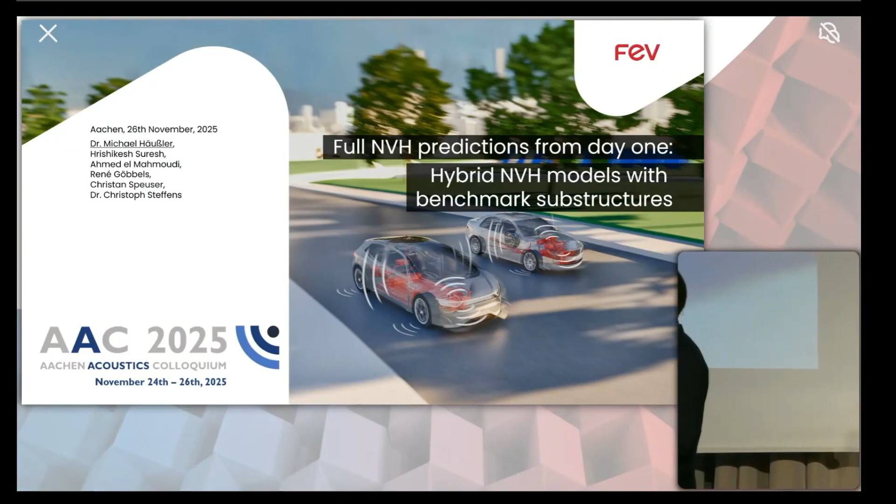So today, I guess the exercise is to show you how to bring the frequency-based substructuring and block force idea into the development process for NVH of vehicles. My talk is called Full NVH Predictions from Day One with hybrid NVH models. That means coupling experiment and simulation models together, and using especially benchmark substructures, because I think this is something that is not yet used as much as it should be to solve problems.

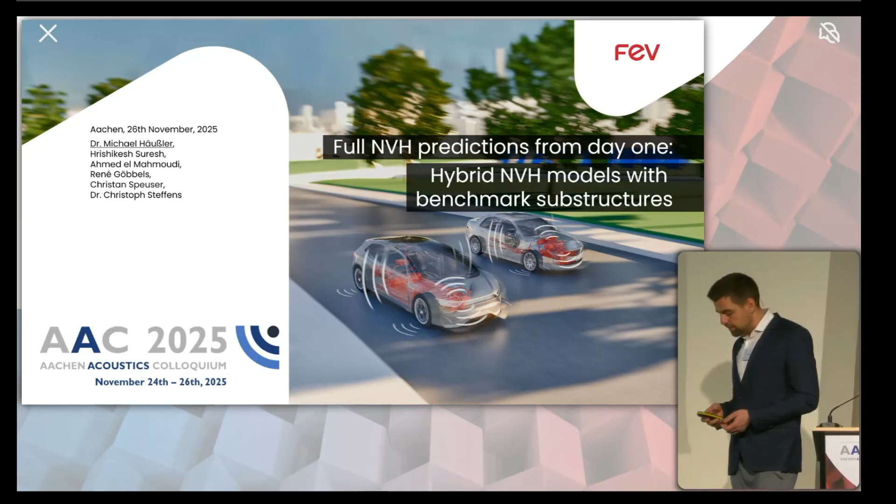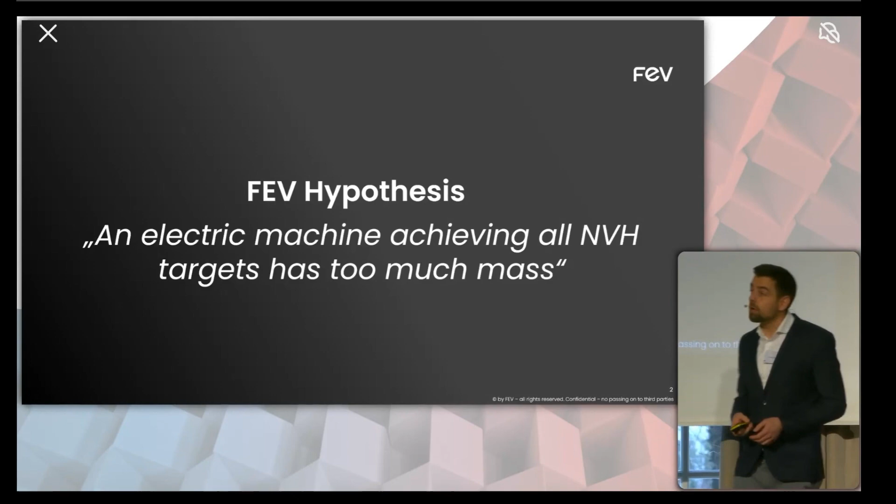And I want to start my talk with a bold hypothesis, namely that an electric machine which is achieving all the individual component NVH targets just has too much mass. I know this is a bold statement, but I'll explain a little bit why I think this is often the case and how I think we could improve the process.

For that, I want to first give you a motivation, namely showing a little bit about the V development cycle that we use for NVH engineering and the integration in the car. After that, I have a few slides on the basics. We've heard a lot about the theory from Daniel Rixen now, so this is from a high-level overview. And then mainly coming to the third point, which is building a model library of substructure components from benchmark testing.

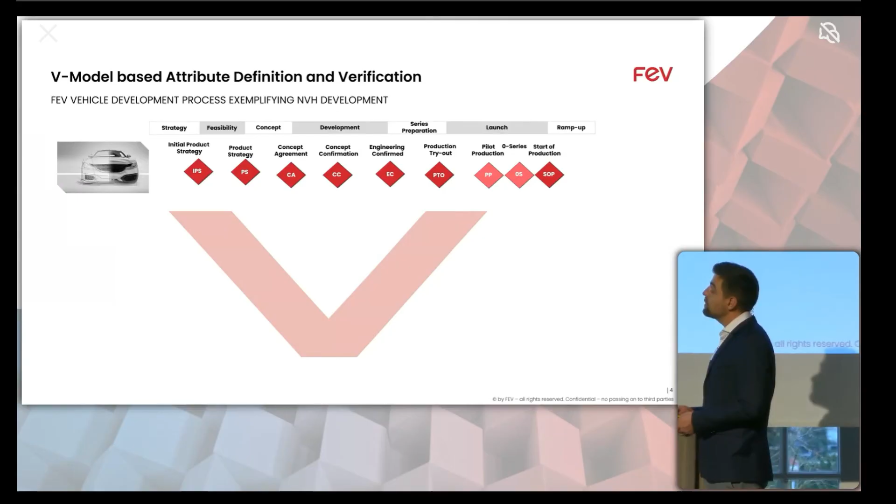So starting again with the V model, we want to have a nice product. We start in the concept phase. The first thing we do is check on the customer level what the drivers want to experience. What does best-in-class NVH mean for the product we are designing? Then from this complete vehicle level, we need to go down to the system level with a target cascading, and finally also come up with targets on the component level, specifying all the individual vibration levels, airborne sound excitations, transfer paths, etc. Here we also have agreements which are, in fact, legally binding with suppliers, for example.

Then afterwards, if we go into the hardware phase of the development cycle, we get the first prototype data in. And we might get violations of these component targets. Then it's really the question: do we want to change something? It might be expensive. Later, if you integrate this component, you have all these goal conflicts between NVH and driving dynamics very often. Driving dynamics guys want the stiff bushings. We want to have the soft bushings.

There's also some goal conflict sometimes with the efficiency of the electric motor, for example, which is the example I'm going to use in this talk. Also in our paper, you see something on the Audi SQ6, where they played around with the inverter control of the EDU to find a balance between NVH and efficiency in some speed ranges. I think that's quite interesting. And of course, I have to mention that you can do over-the-air updates when the vehicle is already out at the customer to fix some sounds that you don't want. But even with sound design, you can't really fix a bad mechanical design.

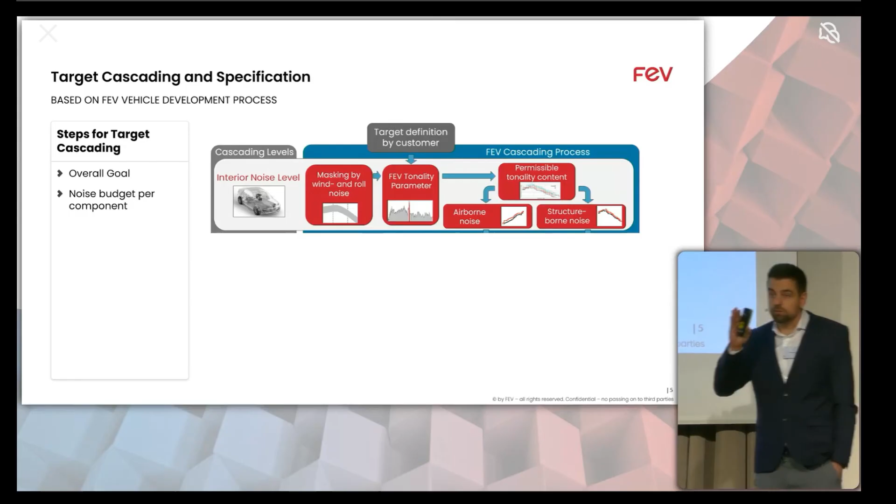So I want to talk a bit more about the target cascading process, in a nutshell, how that is typically done. As I said, for the example of the electric drive unit that I'm showing here, we have our goal at the driver's ear. This is really what we want to achieve. The driver should have a comfortable ride. So in words, the target is a quiet ride without any tonal or harsh components. For the EDU, you've got some masking noise from the wind and rolling, and the tonal order components from the EDU shouldn't stick out of this masking carpet too much. So you might come up with a tonality parameter to specify the target for the sound of the EDU in the interior.

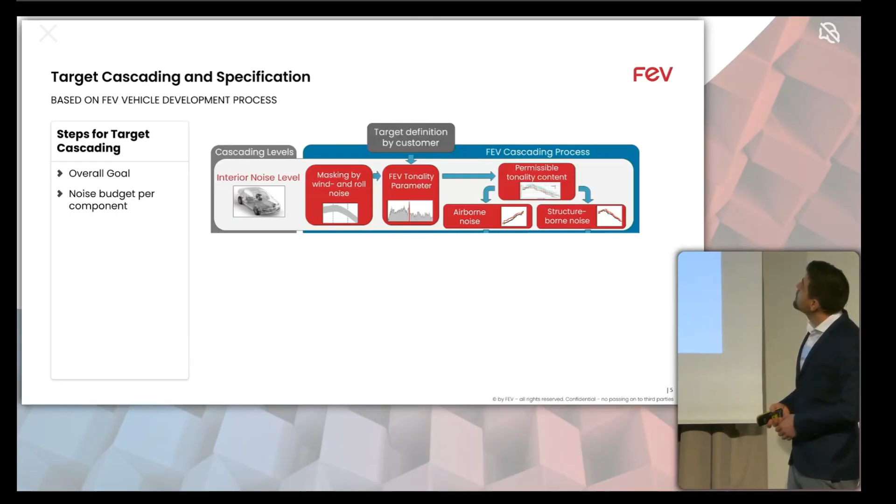And then you already have to make an assumption, namely because you have to break down the sound in the interior into the airborne contribution, so what does the housing of the EDU radiate directly and which comes to the driver's ear, and what goes over the structure-borne path. And this is already a mathematically underdetermined problem, right? You've got a single target, and you've got to give two targets to two paths. So this is by definition mathematically underdetermined. There's infinitely many solutions. You've got to make some assumptions.

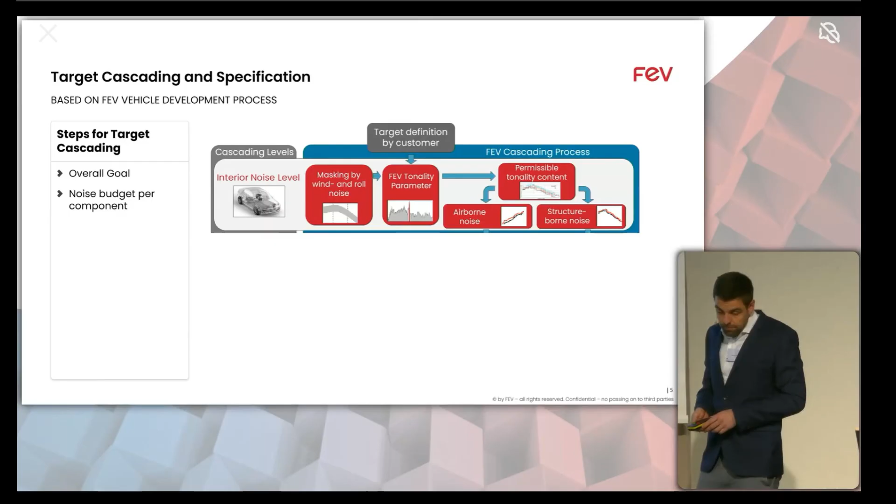And if you go then even further, you need to cascade it down. So you've got individual transfer functions for the airborne excitation. There's a little bit of a secret sauce and some, let's say, culture at each OEM, how they do that. And the same goes for the structure-borne transfer functions, where you just know maybe from experience, from the previous cars, how they look like. And then you also give individual targets for the structure-borne excitation. So that could be vibrations at the mounting points in each direction, or forces at the mounting points in each direction. And that's what you finally give to your suppliers.

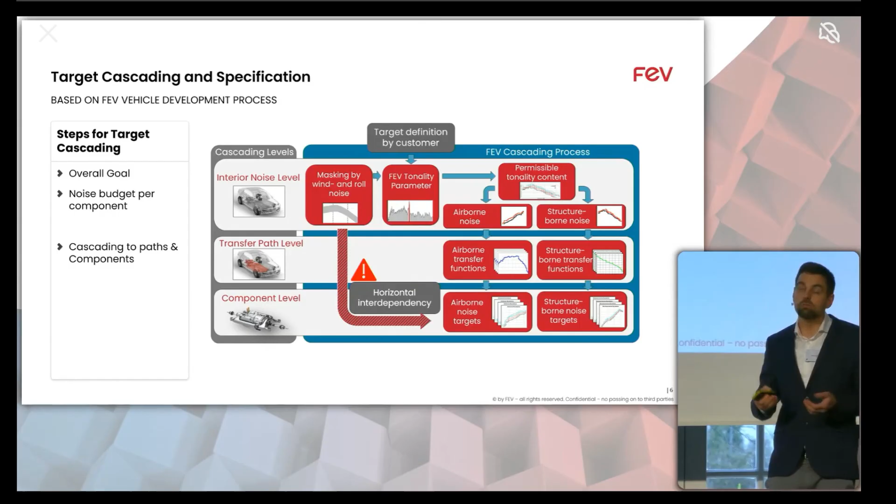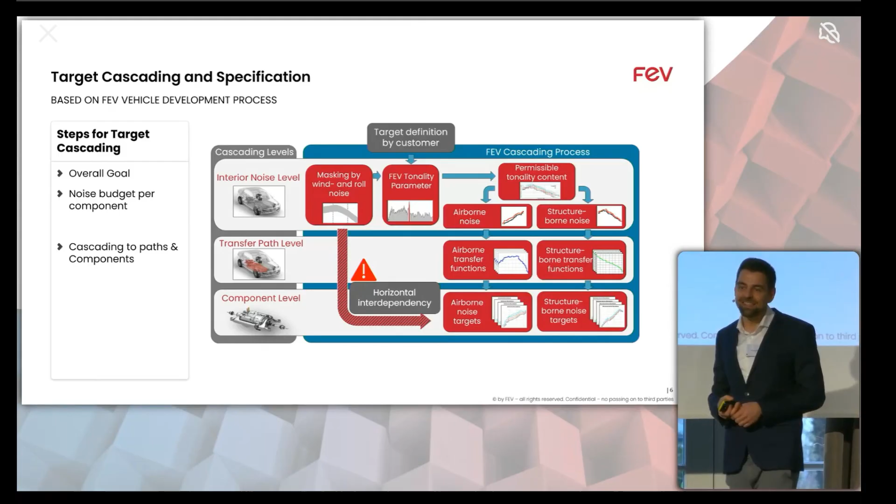But the thing is, when you don't have the car yet, you're making a lot of assumptions, and you have all these interdependencies which you're trying to freeze in this early stage, which is not really there. So when you do this target, you have this horizontal interdependency. The whole EDU target depends on what is actually going to be the rolling noise in the vehicle, what's actually going to be the wind noise. And if they do a better job than they should do, this is a problem for the EDU guys. So you should always hope that your colleagues from the road noise departments don't get much better than they need to. Otherwise, you're going to hear the EDU.

And there's, of course, this other interdependency, which I call the vertical interdependency, namely that you have a single target at the driver's ear, and you want to break it down into a large catalog of individual target curves for all the components and all the individual forces. And that is, by definition, mathematically underdetermined. So some people make an assumption that all the transfer paths stay the same in their individual weighting compared to the predecessor vehicle. There's optimization methods. I think there's clever stuff with solution spaces going on right now, but that's not my topic here.

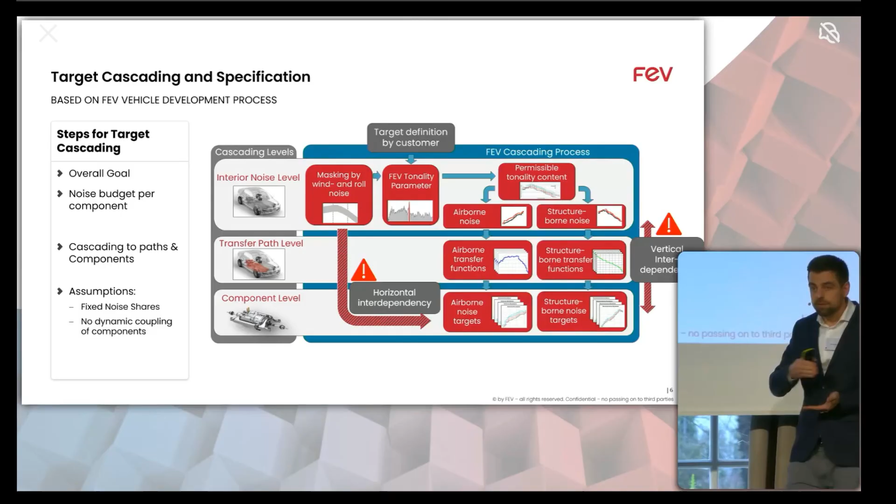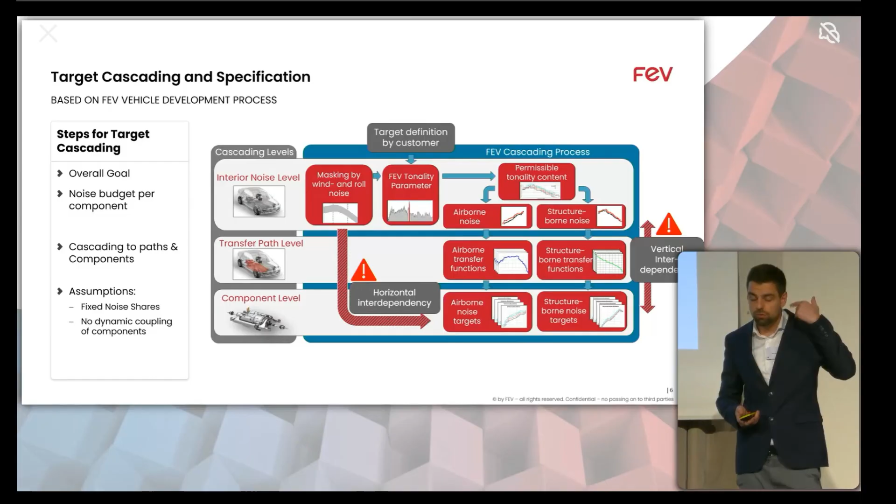The main message I want to give you is that this target cascading process is, in my opinion, important, but it's never really perfect. And I would argue that it's better to have a process which can go directly back up to the driver's ear and see what things mean.

So what this leads to often in discussions between, let's say, an OEM and a supplier of an electric drive unit is, well, okay, we have these targets. This is just one example, for a car transmission. And you have these yellow target levels at different speeds. This is for a single order of the transmission. And you can also see that for increasing speeds, this yellow bar increases because the wind and the rolling noise increases. And in red, you see the measurements at a coupling point measured with an accelerometer. And here you see, oh wow, there's a violation of the target at 2,500 RPM at this one coupling point.

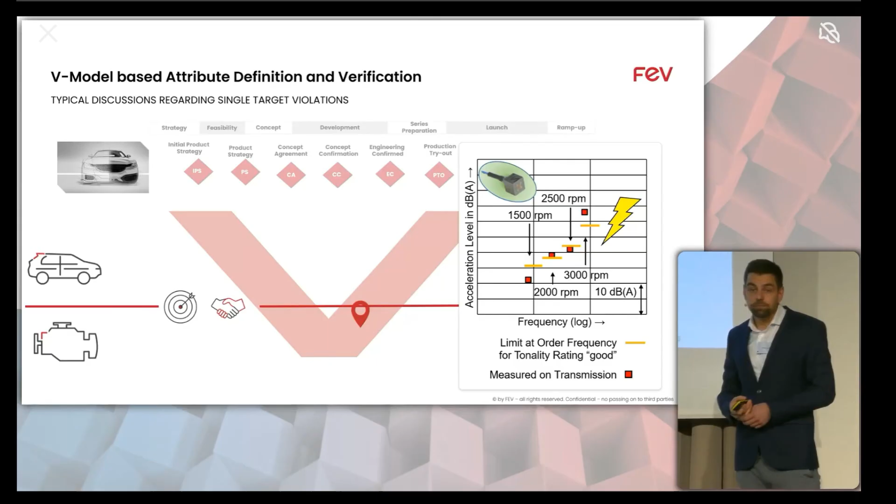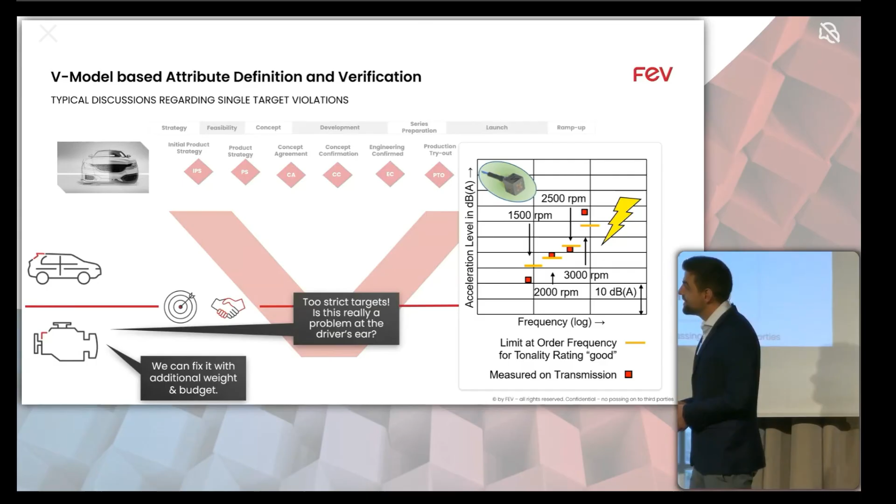And now really the whole fun story starts because then the supplier says, well, we can fix that, but we need additional budget, we need additional weight on the transmission. This is something you want to think about if you intend to produce 1 million units of it. Then the discussion goes, well, I think the targets are too strict. Is it really a problem at the driver's ear? Unknown, we don't have the vehicle yet. The OEM is raising the question internally, well, what's actually the status of the masking noise? Is this really a problem?

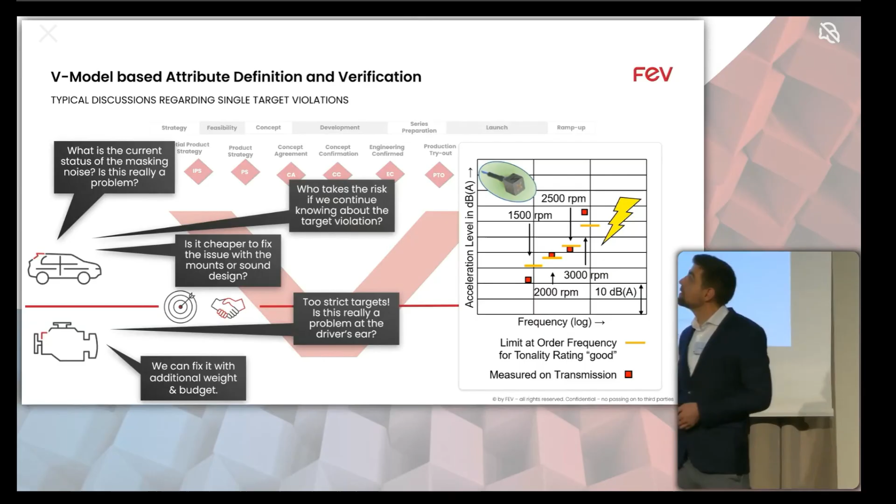Also, it's a question, is it maybe cheaper to fix the issue with just changing something in the mounting system, or can we actually add active sound design to just mask it a bit more? And maybe the most important question of all, who takes the risk in terms of budget if something goes wrong, if we continue knowing about the target violation and something goes wrong?

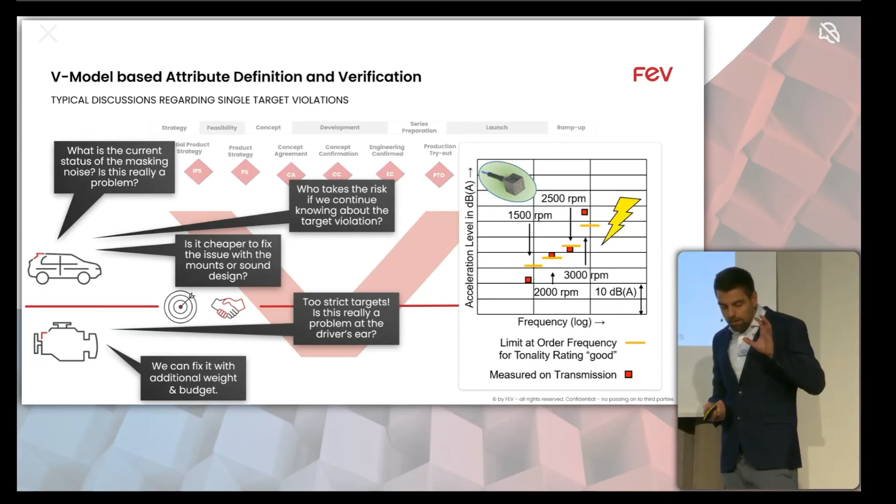So what I want to argue for is that while it's still important to derive these component targets, I think it would be much more helpful to have a full NVH prediction at the driver's ear, actually from day one, and to set up a process where you can have an instant digital NVH twin of the concept you're currently designing.

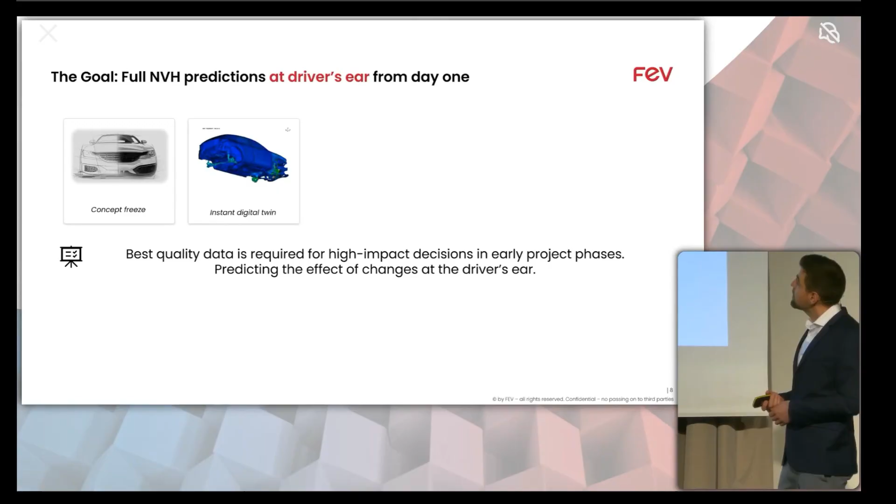And for that, you of course need really good data quality from your predecessor vehicles to make these decisions. Do we want to continue knowing about a single target curve being violated? And have a sophisticated change management process of your full vehicle model, so that as soon as new data arrives, we get in the first test data from the suppliers, we get in updated finite element models of individual components that we can change them like Lego blocks, and you all see where this is going. This is going towards substructuring to see if this is actually going to be a problem at the driver's ear.

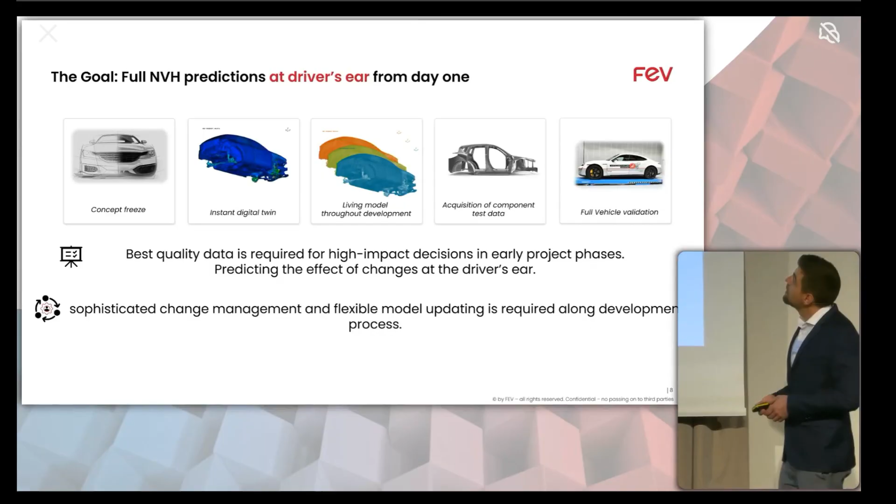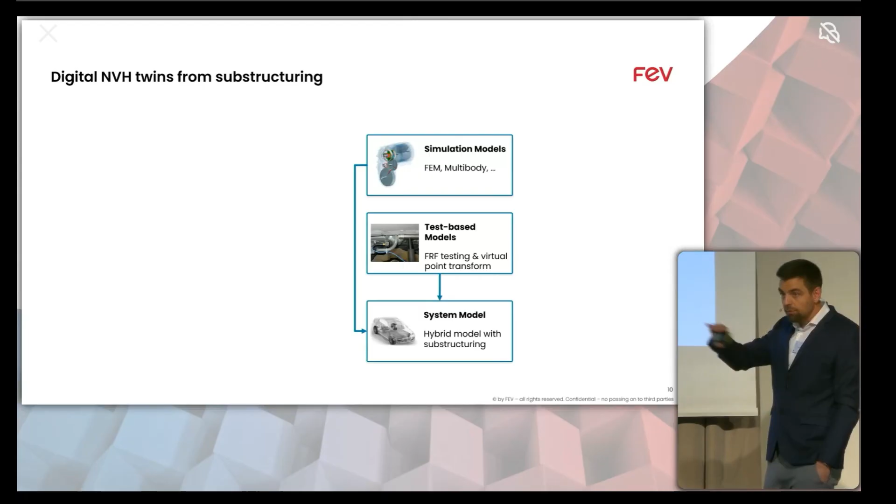So this is what I want to show, and want to go into the basics a bit with how we can create these digital NVH twins from substructuring. So basically you have your simulation models, your test-based models, and you want to couple them on the interface to create a hybrid model of the full vehicle to get the full transfer path from the source all the way up to the driver's ear.

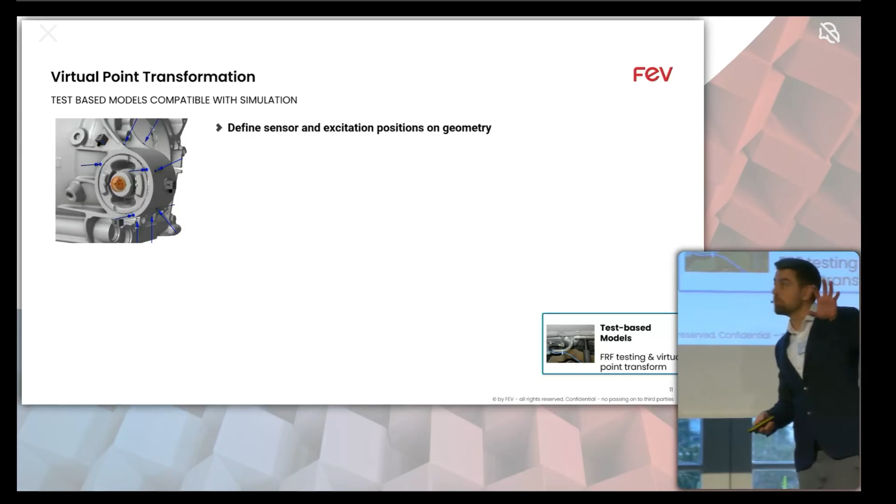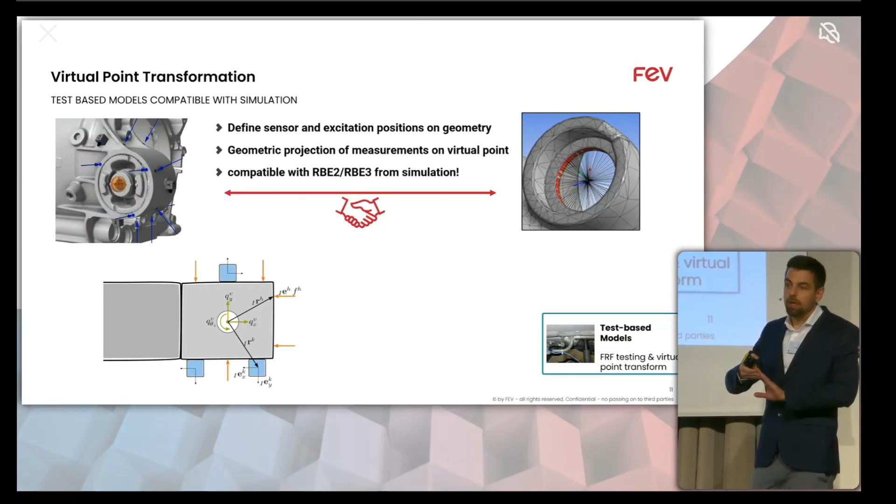And as Professor Rixen has already shown, you can use testing to derive experimental models, and you can use the virtual point transformation. So you basically have the geometry of your component. You place your sensors, you place your excitation points where you excite with a hammer or a shaker. And then from knowing the geometry, you build these transformation matrices, and project everything into the virtual point. And that is, in principle, compatible with simulation, where you have these RBE2 or RBE3 spider elements, and you can enforce this compatibility equation, namely that they do the same vibration and that the forces are in equilibrium at this point. And thereby you can couple very flexibly, actually, simulation and test-based models to each other.

And this is an example from still my PhD thesis that I brought. This was about the electric climate compressor in a car, which I show because you can see how flexible this is, how you can mix the models. So the climate compressor was basically modeled as a rigid body. That was the simplest and best model in the frequency range of interest for the climate compressor. Then you have an experimental model of the rubber mounts, or this could also be just a parametric analytical model if you're still in the concept design phase and thinking about what do we need in terms of stiffnesses there. There was a finite element model of a pure metal intermediate carrier. That was basically an isolation mass, just a metal structure. Finite element is perfect. And then a transfer function of a mule vehicle. So this was one of the predecessors which was used to carry this concept. And then it was actually built up, this assembly, and that's what you see at the bottom here.

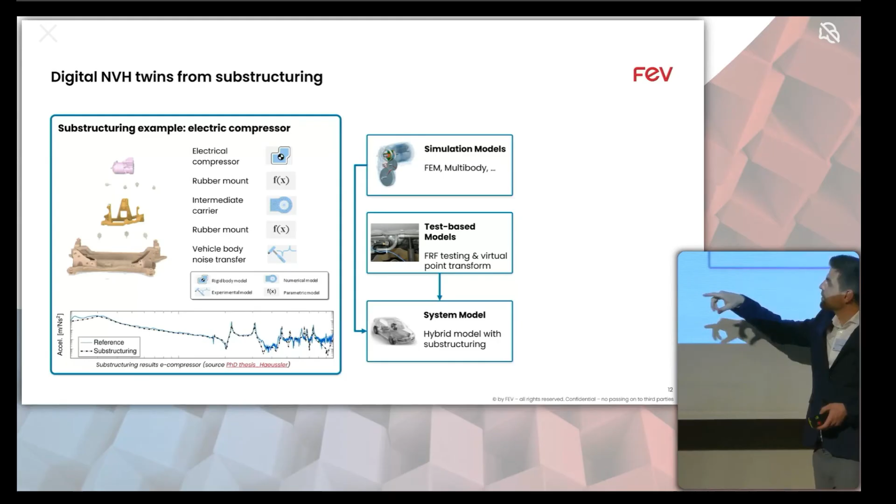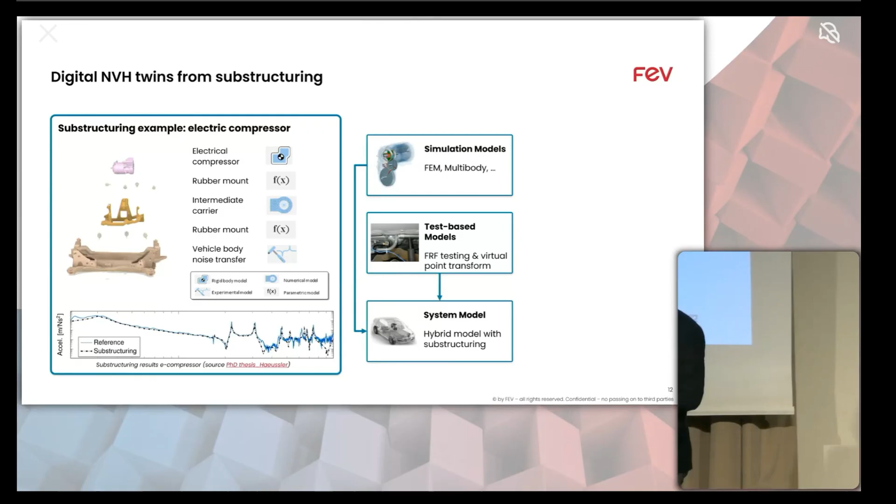This is just one single FRF curve where you see the actual measurement in blue, and in black the prediction with substructuring from all the individual components. And what you also see there, what I find interesting, is that also here at the higher frequency range, I think this stops at 1 kilohertz, that's because the bushings were so soft, you couldn't get enough energy in with your excitation equipment, so it's really noisy. But with substructuring, you model each structure with a good signal-to-noise ratio, or it's just from simulation, and you can even get cleaner predictions up to high frequencies. If everything goes well and the interface problem is well conditioned, I was a bit lucky because the bushings were quite soft, so it's kind of a real-world way to do regularization on the interface. Anyway.

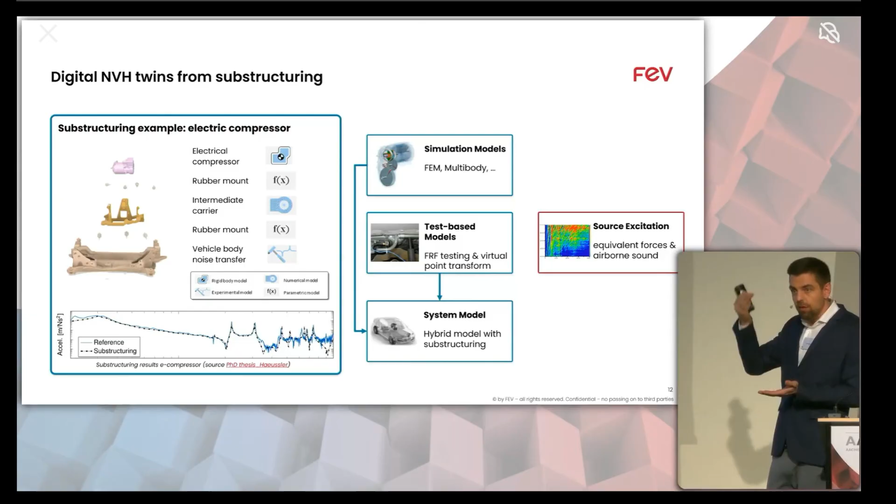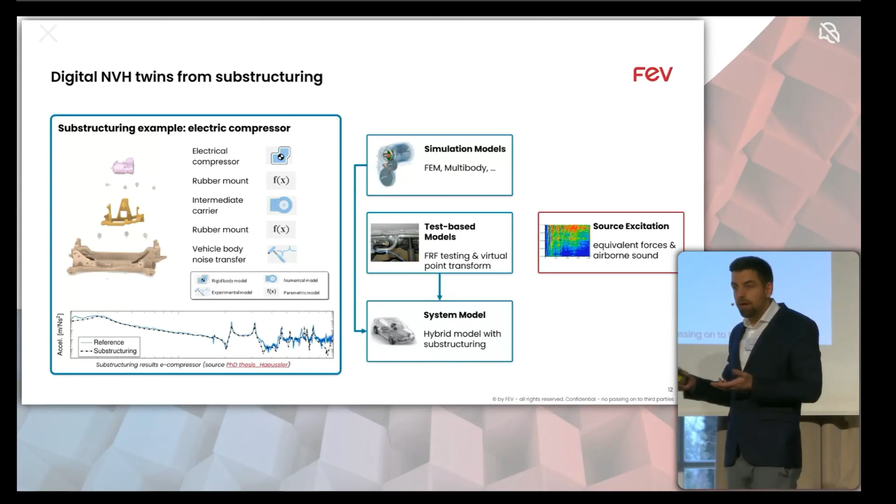So the last thing you need, you then have the transfer path from the source all the way up to the driver's ear, and the last thing you need is a way to describe the source. And this is, as we heard, can be done by blocked forces or some way of equivalent forces. The same is for the airborne sound. I'll go into this in a bit.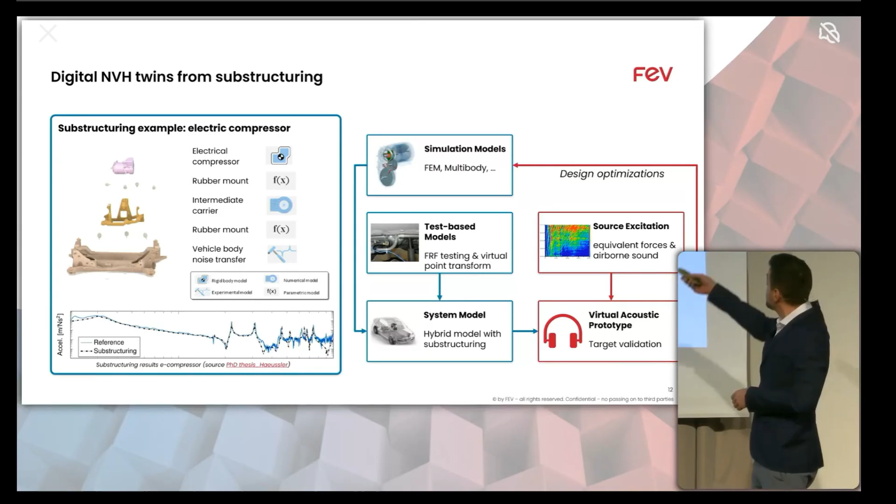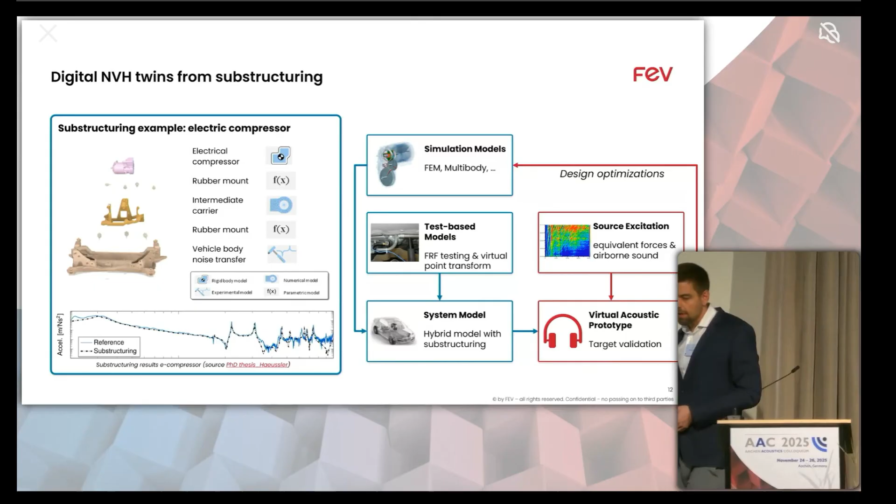So finally, you have what I said at the beginning. What is the target? You want to have actually a prediction at the driver's ear as early as possible, because that is finally what you're selling to your customer. You're not selling a target curve on the engine, you're selling a sound at the driver's ear. Good. So, yeah, and you can then make a, in my opinion, more justified decision if you want to change something on the system, or if it's actually just a violation of a target curve, which doesn't really matter at the driver's ear.

Good. So what I think makes sense to do is something that everyone is already doing, and also we at FEV are doing quite elaborately, namely benchmarking. So you get benchmark vehicles, you see outside the door, you see the Xpeng G9, to find out what is actually the current status of the market, the best-in-class NVH.

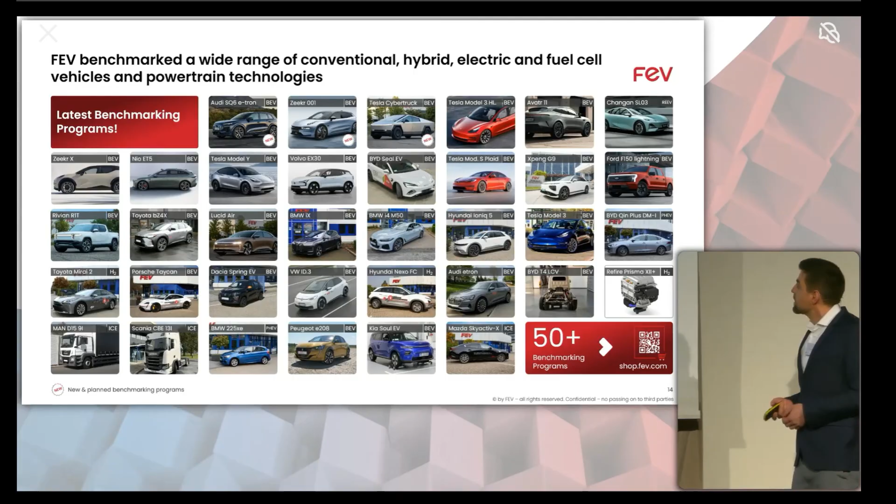And we have a benchmarking program here where we basically monitor the markets, take the most interesting technical concepts, get the vehicles in, and give you quite elaborate benchmarks and store that in a database called Karat. So what we do basically, this is a more recent roadmap. This was from 2025, is that we have 3 benchmarking centers worldwide, one in Europe, one in China, one in the US. They monitor the market and take the most recent models from the local market. And then we do benchmarking on our own initiative or on customer request.

And this is done in what we call level 1, level 2, and level 3 benchmark, where level 1 means the what, so what the driver experiences. In terms of NVH, this means we drive the car, we do measurements at the driver's ear at a certain test matrix, different driving conditions. We do subjective evaluations with our NVH engineers. And that's the level 1 benchmark in terms of NVH. And we do that for all the other attributes of the car.

The level 2 would mean, after the what, kind of the why. And for NVH, this means we do a more elaborate instrumentation. So we put a lot of sensors on the individual components, more microphones. So say at the EDU, at wheel knuckles for the road noise, etc. And at level 3, then it's really the tear down of the car. So where we disassemble it, where we do elaborate documentation of all the parts, also an estimation for what this costs and how it was produced and why it is designed in a certain way.

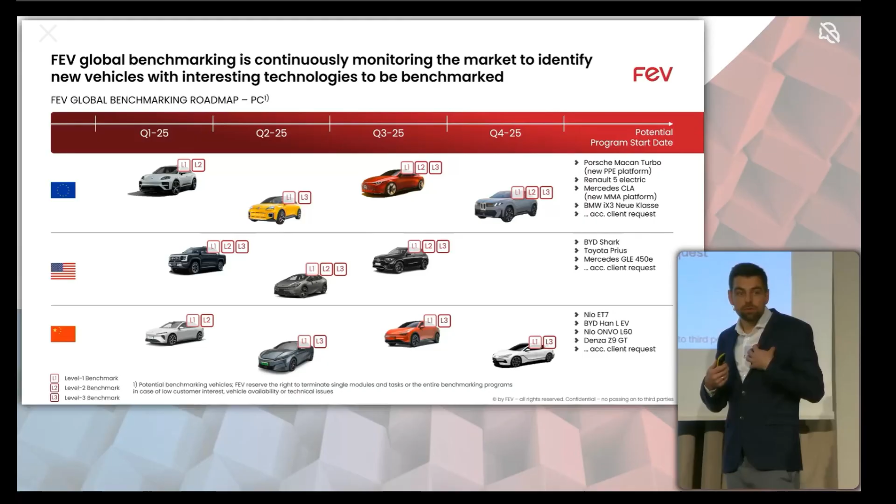And so this is the overview of the benchmark program, but for me, this was very natural to say, hey, we should use this for NVH. If we do this anyway, we should build a model library that gives you kind of modular models of all the benchmark vehicles. So concretely, this means on the example of the EDU, we want to have a source model of the EDU. So we need to have something that describes the structure-borne sound. Well, that's equivalent or blocked forces. We need to have something for the airborne sound and something for the passive dynamics.

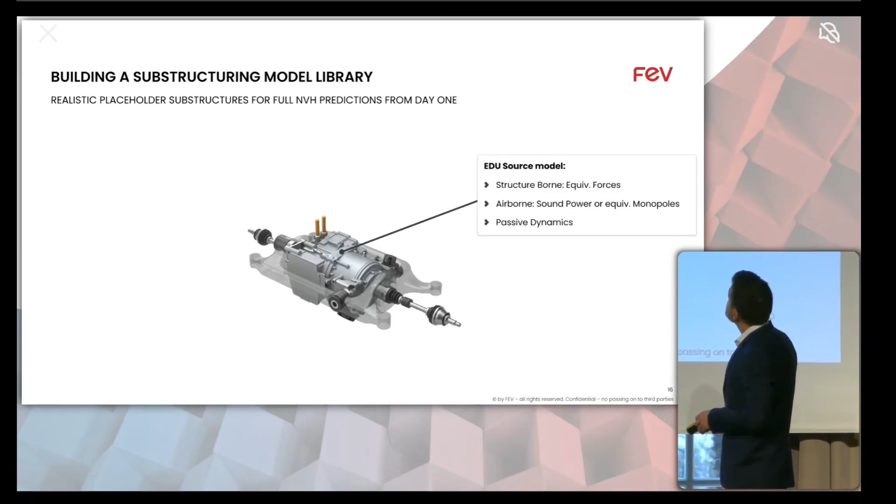So going into this in a bit more detail, say we are at a level 2 benchmark. This is the Audi SQ6, and we do operational measurements. This is an all-wheel drive acoustic dyno of the car. We often take a 3D scan of the EDU in this case, because it's a benchmark car. Audi wasn't nice enough to give us the CAD geometry, and even if they had, we wouldn't be allowed to use it for public purposes, but this is a car that FEV bought.

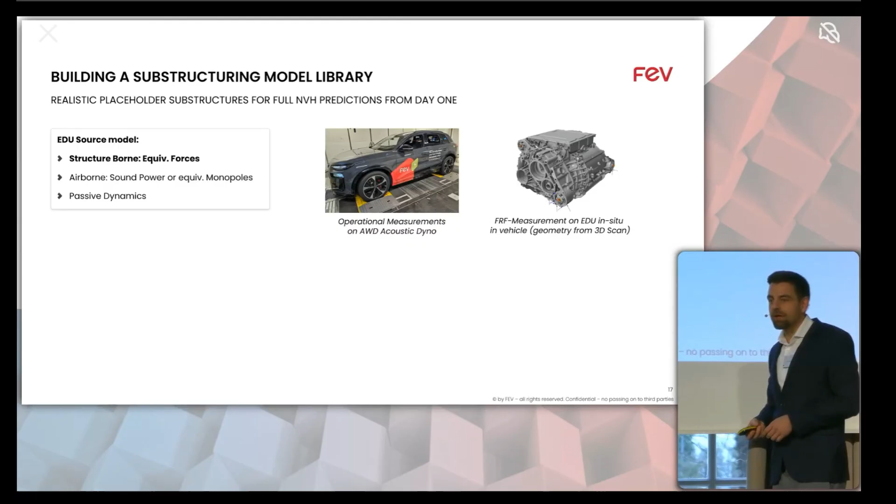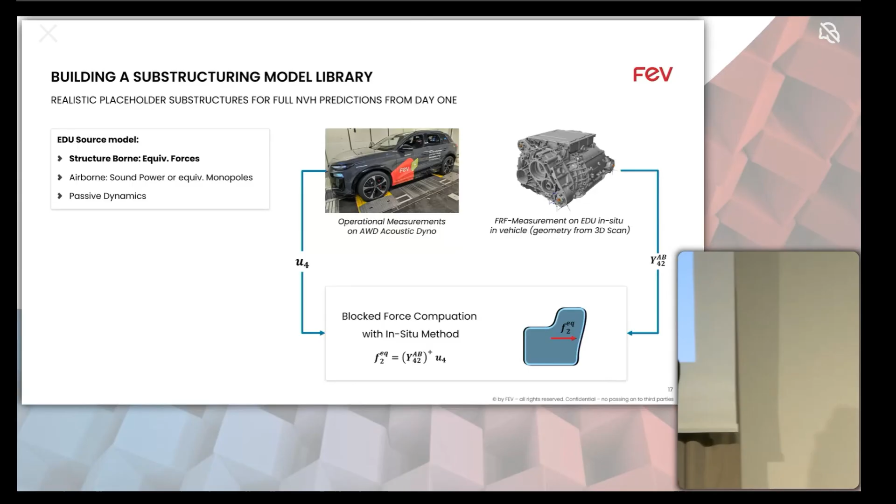Okay, so we have the geometry, we can place our measurement equipment at the coupling points, we can do impact testing, and then get an operational signal from this test matrix we do, and we have the transfer function that we measured. And as you've just seen, we can compute the blocked forces, which describe the source, so the EDU excitation, in all these different driving states that we test by computing them with the so-called in situ method.

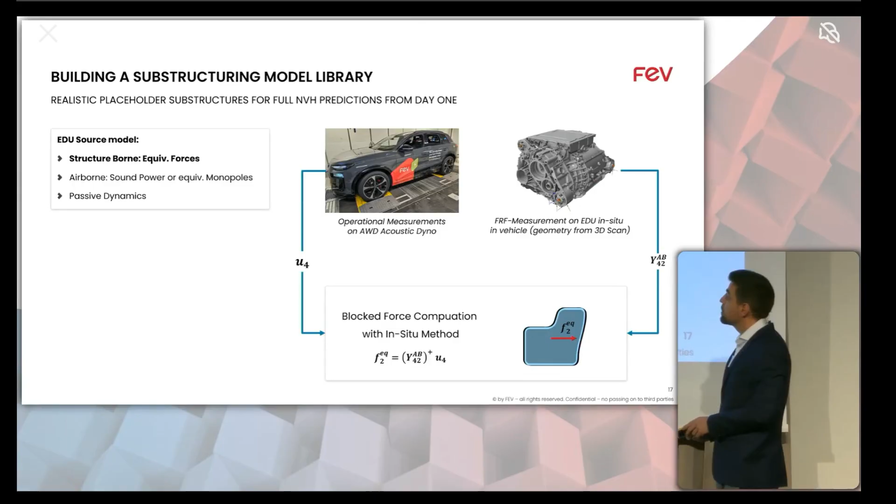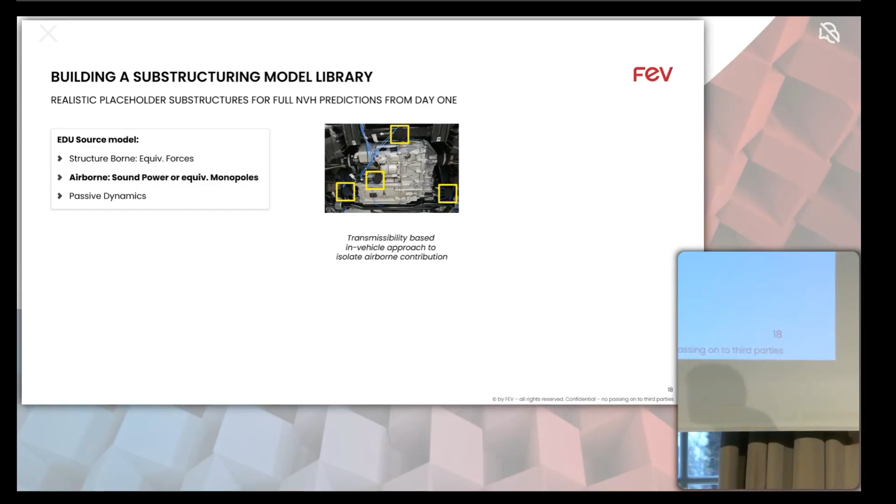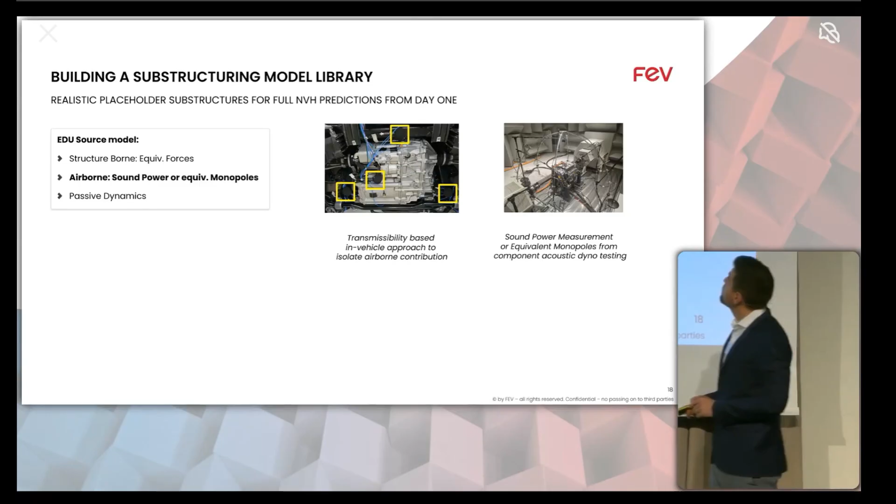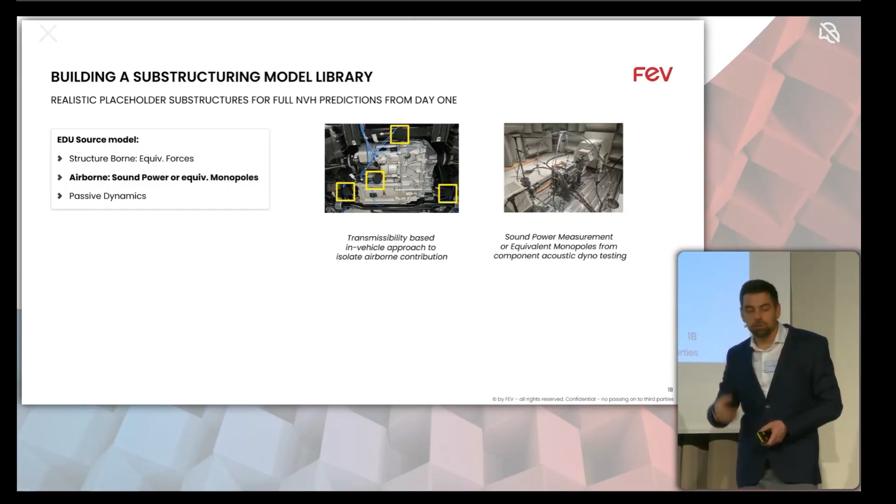The other thing that goes into the database is the airborne sound path for the EDU. If we do just level 2 testing, we can at least take out the airborne share by a transmissibility-based approach. Take out the EDU. This is what you can see here at the top right. We can either measure the sound power if you just have a single airborne noise target, or we can even take equivalent monopoles and describe the source with that. So some monopoles at the surface, you can derive them just with the same kind of active noise cancellation analogy that Professor Rixen has just shown for the blocked forces. It's mathematically exactly the same.

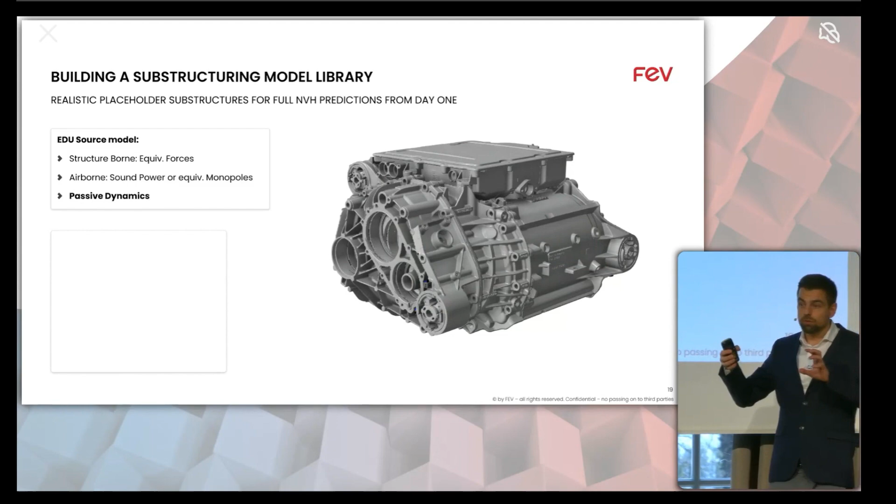And then as the last one, you want to have the passive dynamics of the EDU. So if you want to virtually couple it into another receiver, you need to know what this is doing, how this is interacting with the neighboring components. So basically, we do this impacting. We hang it up free, right, with rubber bands.

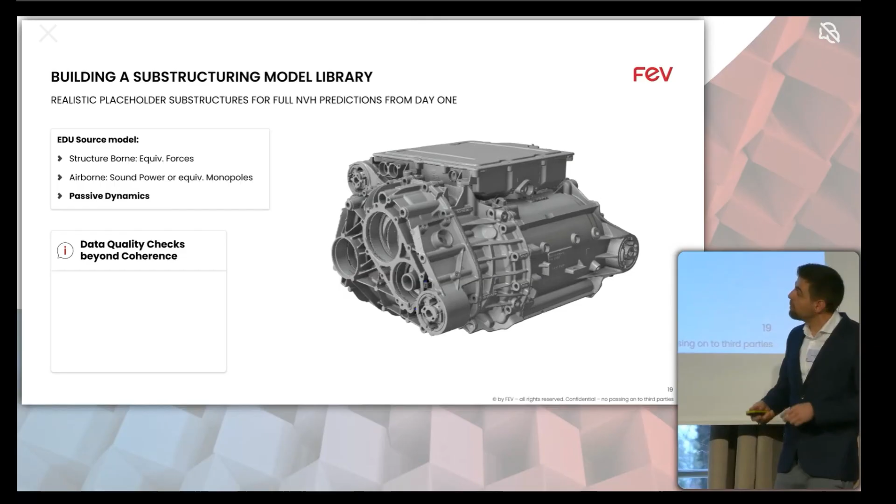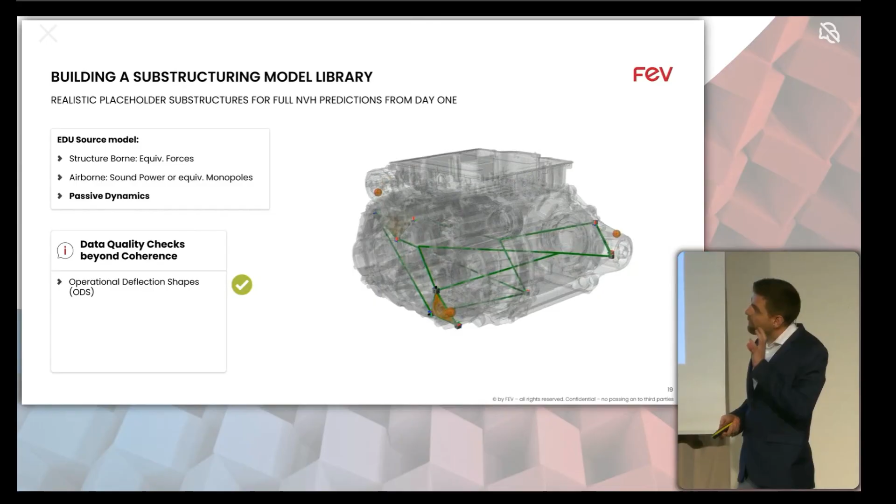And you also do quite a few data checks. There's going to be more on that in the next talk, I think. But basically, there's a lot of things that go beyond just classical coherence, which is that you look at the operational deflection shapes, if all the sensors are applied correctly. There's this virtual point consistency that Daniel Rixen has also talked about. And the later talks will talk about this too.

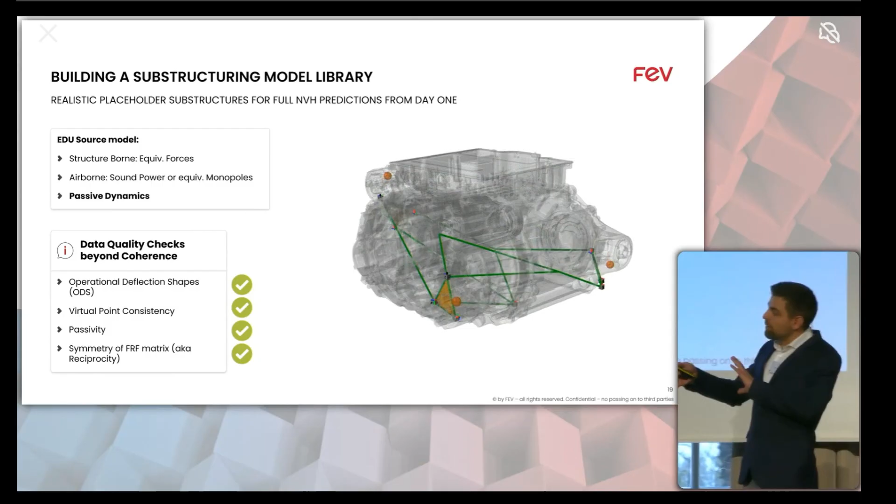There's passivity. You don't want to have negative damping. I was sometimes happy that I found a perpetuum mobile, but mostly it was a measurement error. So you want to check that. Also the symmetry of the matrix, in order to have quality data to go into this substructuring library that we're building. And then if we take out the car, the next thing is the rubber mounts.

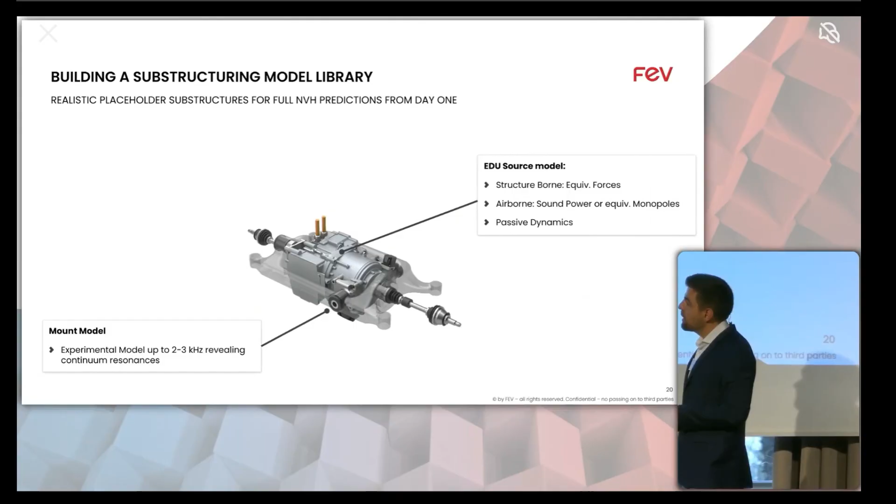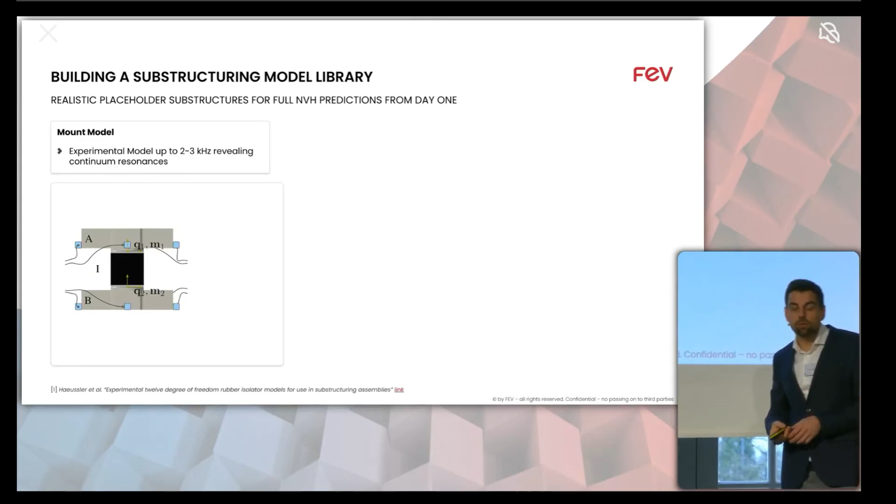Daniel Rixen has already explained this method of attaching transmission simulators to the rubber mounts. So these are basically just rigid blocks, which you can describe as a rigid body just from the CAD model. We took your mass, your rotational inertia. You decouple them with decoupling after impact testing on this.

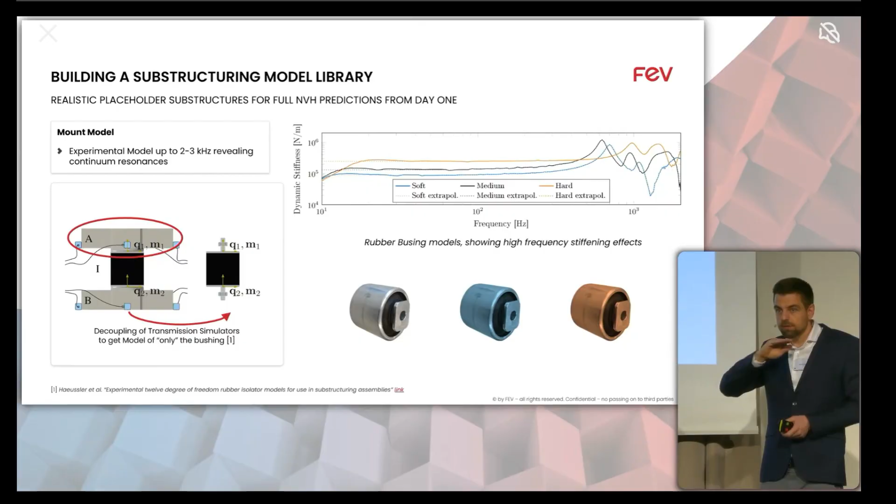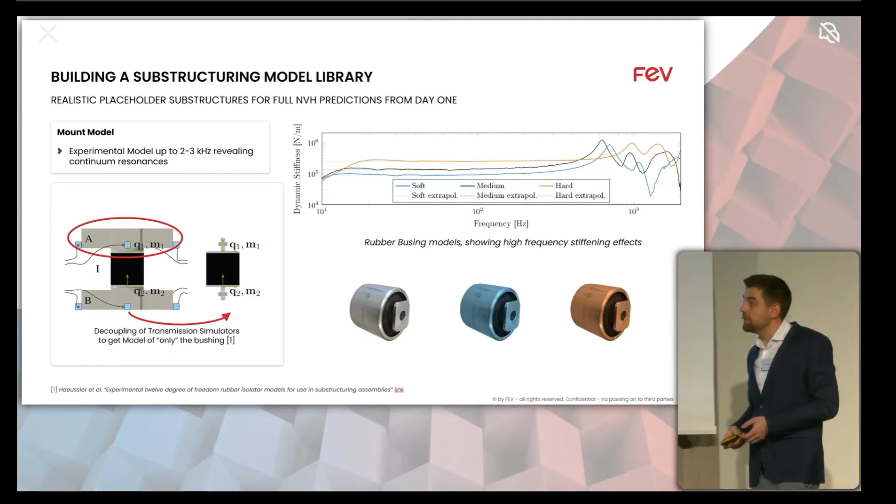And what I really want to show, why this is important for electric drive unit sound, is here the obtained dynamic stiffness of 3 different mounts, which have a nominally different constant stiffness. But you see that here in the higher frequency region, you all of a sudden have continuum resonances in the rubber itself, and that can cause quite a large stiffening of the bushing. So it can lead to a effect where actually the soft bushing is behaving much stiffer than the hardest bushing, and that is, of course, in a frequency range that is interesting for EDU sound. So you want to have that in.

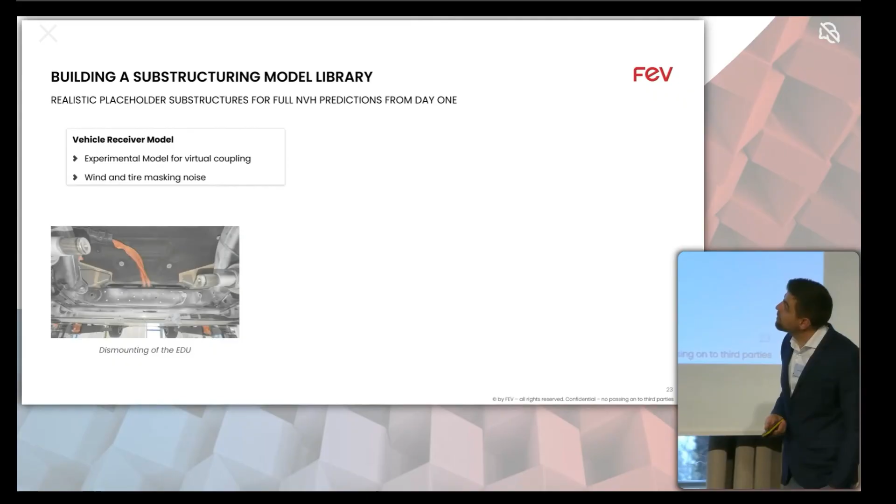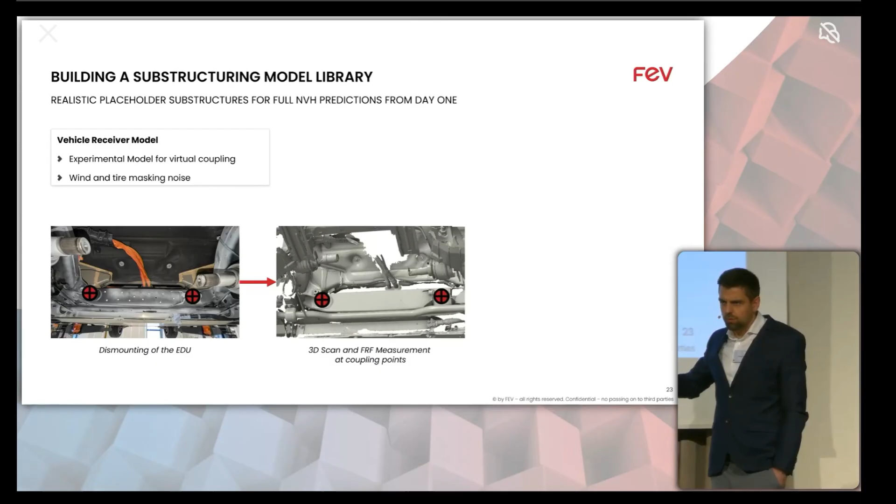And the next one is you need to have a model of the virtual vehicle. This is the most difficult one to simulate. So in an early project stage, you might take out a vehicle which has a similar architecture to the one you're designing. And what we do is, as I said, we dismount the EDU. We again do a 3D scan of the compartments. We define the virtual points where you can couple your new concept or the other EDU. Measure the transfer functions at these coupling points for coupling, and also the transfer function to the cabin.

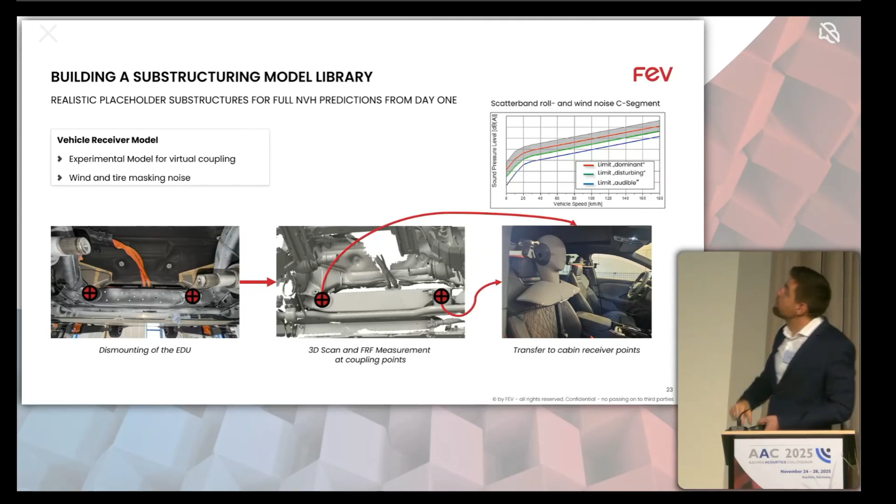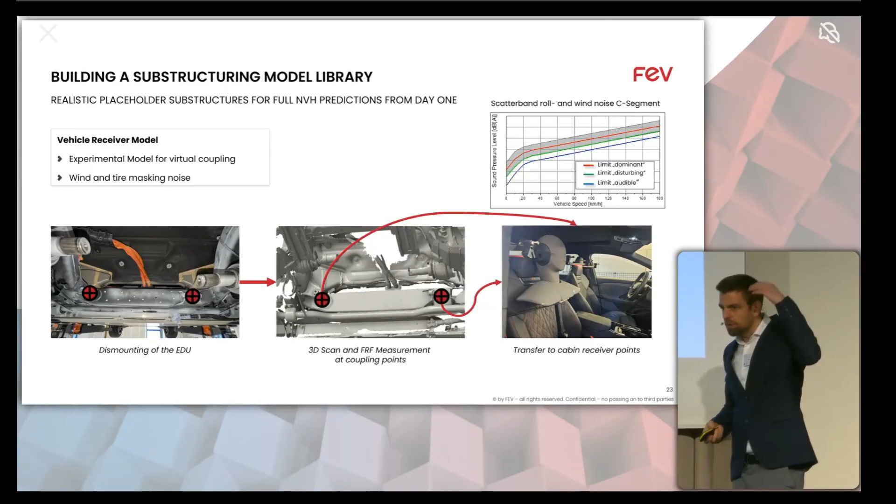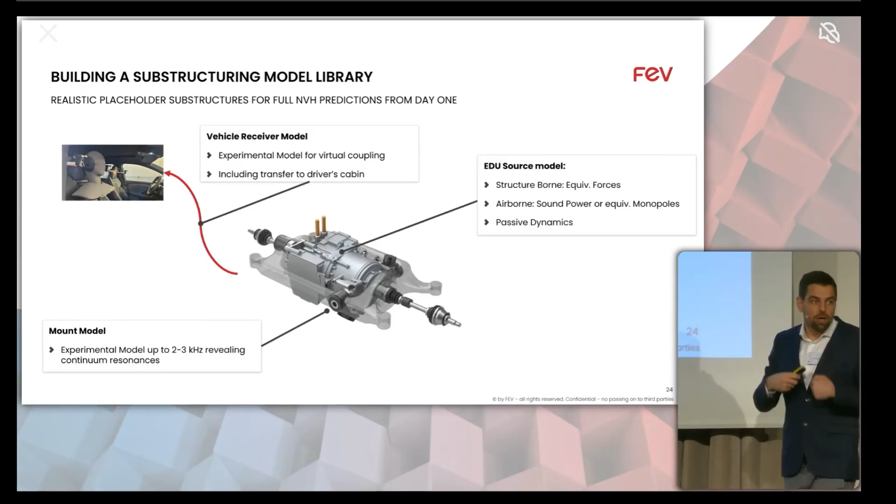And the last thing you need is also the masking noise for the example of the EDU. So we have scatter bands for the rolling and wind noise masking at different speeds. And from that, you can also judge, okay, if I virtually couple my EDU into this receiver, is this going to be audible or annoying or whatnot? So that's the whole idea. This is how we can take apart a benchmark vehicle and build a modular model of that and be much earlier with the predictions at the driver's ear instead of just looking at single target curves for the component. And this brings me to the summary.

I don't have enough time to show you the Audi SQ6, but that gives me the reason to make you curious about the paper. As I said, when we did this on the Audi, we saw quite an interesting interaction between the EDU excitation, the inverter control, and the vehicle transfer functions. You can look at that, but mainly my message is that FEV has started to build up this database for frequency-based substructuring, and we're building this for e-motors, transmissions, mount models, vehicles.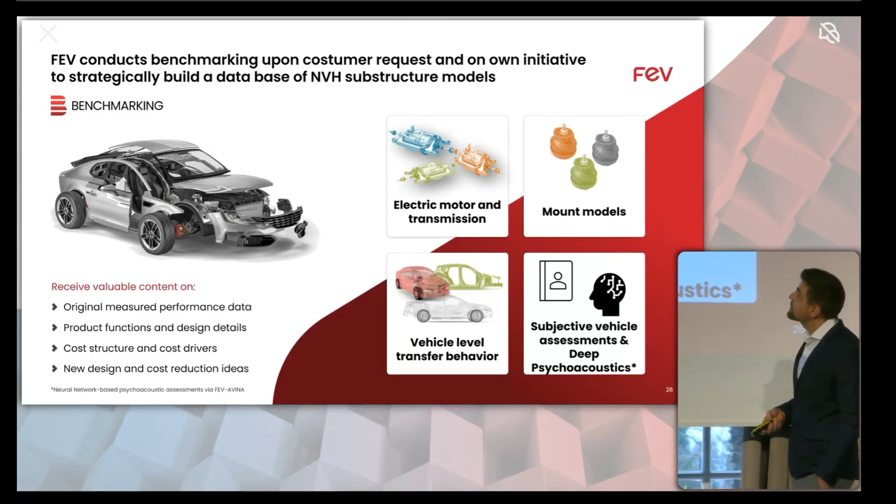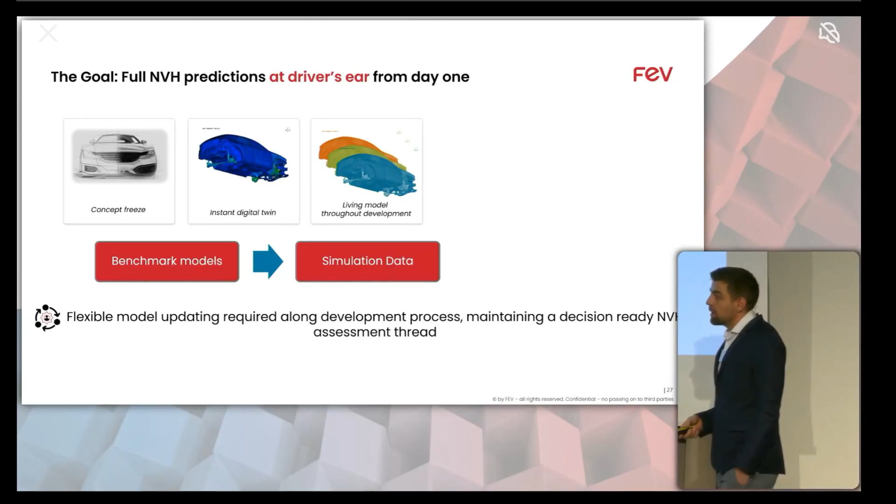Also, if you are interested in some models, we can talk. And this really helps with getting this workflow that I described, which would be desirable, because you can then, in an early stage, take benchmark models for the things which are difficult. You just take a receiver and you insert your concept in that, and then every time you get new data, someone has updated a model, let's say the rear axle carrier, or there's new mount models, measurements from the suppliers, or the EDU supplier has simulation data or first test data, you can easily update that into this modular model and basically substructure it together like Lego blocks.

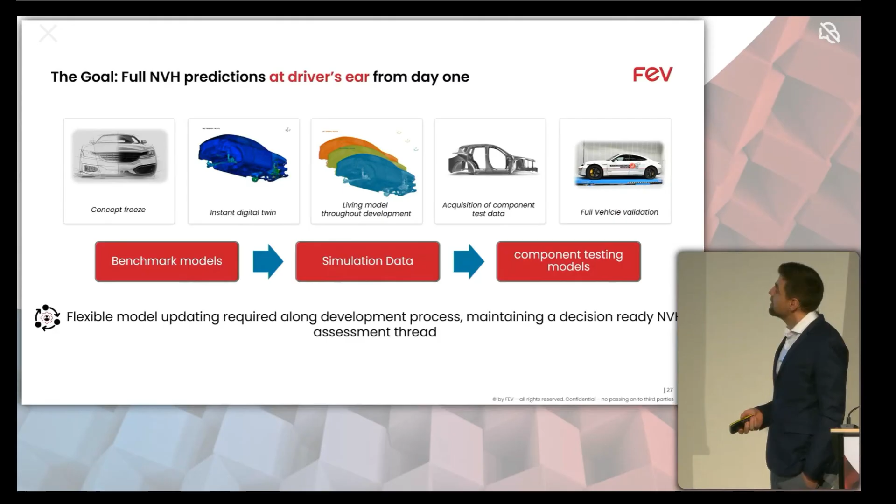And instead of looking at just gazillions of curves on the component and trying to judge if this is going to be a good EDU sound or not, you can actually listen to that at the driver's ear and keep your decision process for NVH decisions ready at all the stages, and especially in the early stage. And that was it.